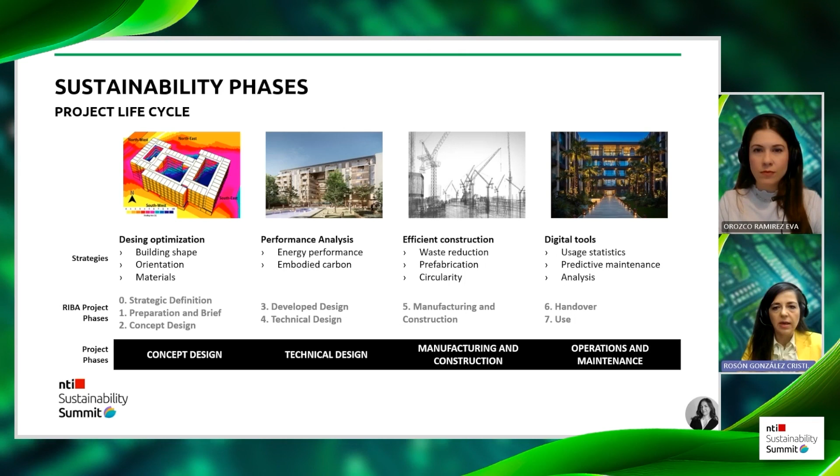So here we are going to start explaining how we use this methodology in these pre-design phases, these early design phases. For that, we usually do some initial sketches and concept model designs, in order to have this basic shape to understand the project in its specific location, which is really important to understand, and this is going to define the project methodology: the specific location of the project.

We have to first understand the specific climate and location of the project, because this is going to inform the design, along with other features of the specific project architecture and other characteristics. Climate is the most important part and so crucial to the design process.

This is because, as you know, it's not the same thing to design a project, for example, in Saudi Arabia or in Canada or other different locations around the globe. Even within Latin America, for example Mexico, the design techniques and bioclimatic architecture principles we apply are going to be different, because even within the same country, the specific altitude of a city or part of the country can be radically different.

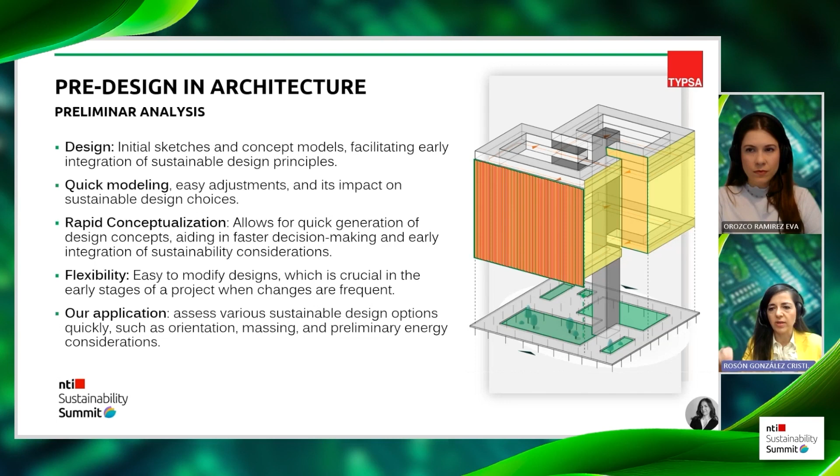Having that in mind, we are going to show you a video of how we approach this design process in a specific project.

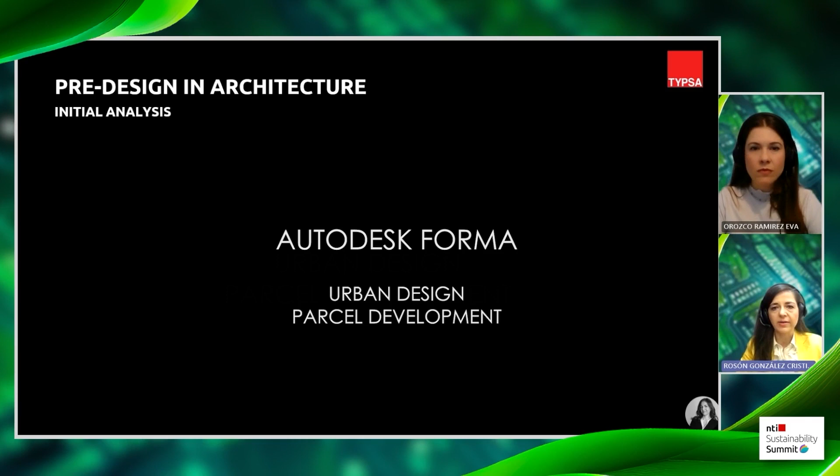This is a project in the northern part of Spain, in Cantabria. It's a healthcare project, a hospital. As you can imagine, the location here is really important to understand the amount of light we are going to have and how this sun exposure is going to affect the surface of the project.

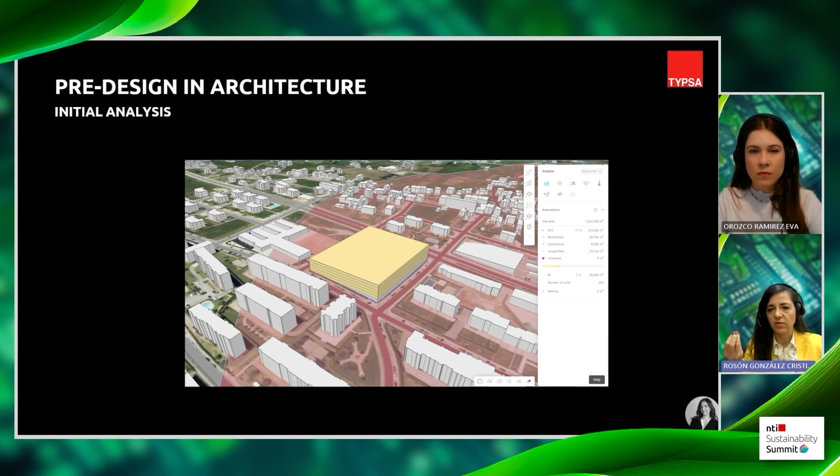It was also really important for us to ensure the privacy of the patients in this case, along with the workers who are going to be there. So we want the comfort and well-being of both occupants — the transients, in this case patients, and of course the workers.

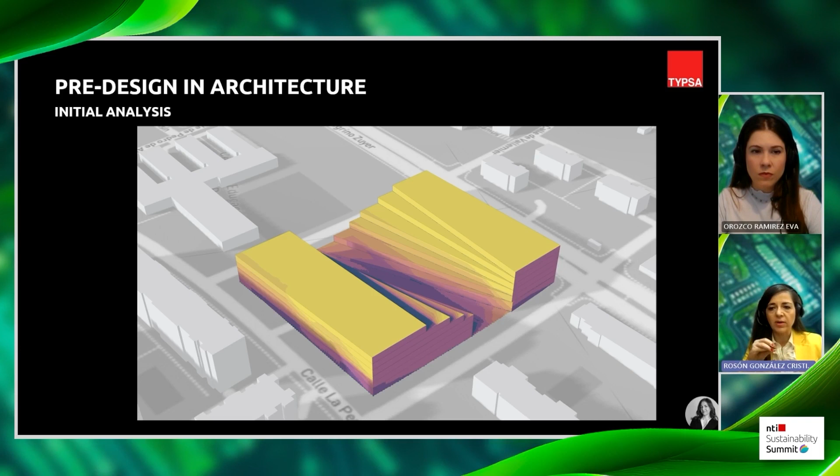As you've seen in this video, we started with a really basic shape with this orientation, but we noticed that sun exposure was really important. So we decided to break this basic shape into different parts to understand how we could gain more light and daylight into the buildings, spaces, floors and levels of the project.

That's why we started with this basic shape and transformed it into this kind of stepped form, with different steps along the shape of the project.

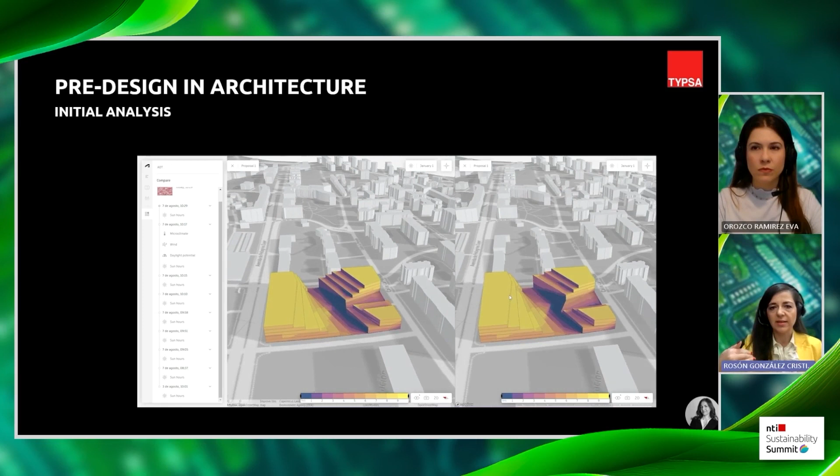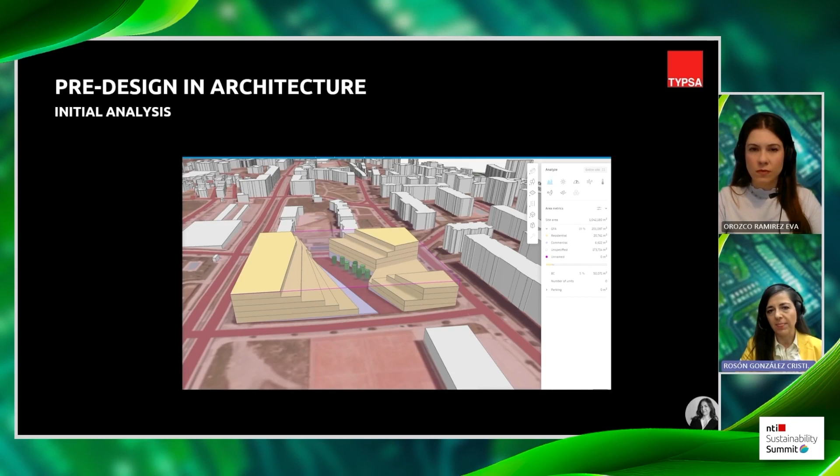In this case we have different orientations, but after that transformation of the basic shape, we turned it into three different buildings that helped us solve the problem we had in this specific project, and make it bioclimatic, incorporating this bioclimatic specific design and structures.

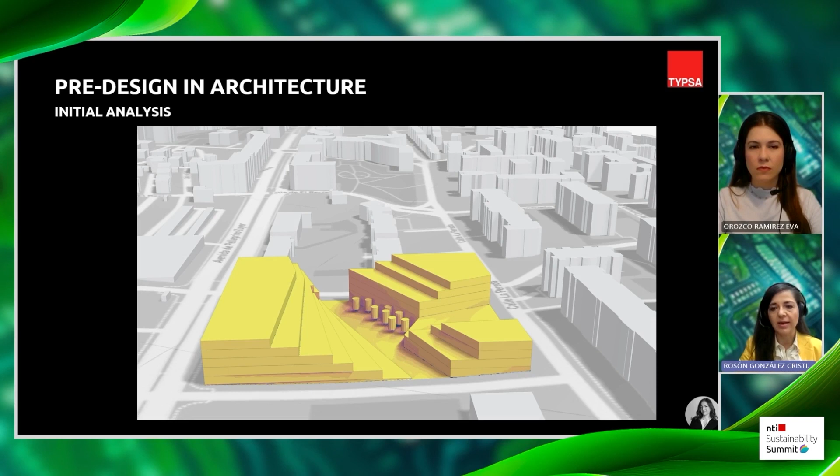Also, this basic analysis with this tool helped us introduce other elements, like vegetation, to use the prevailing winds to make the open space better for the final occupants of the building. So, to sum up briefly, this is our methodology approach for these basic projects.

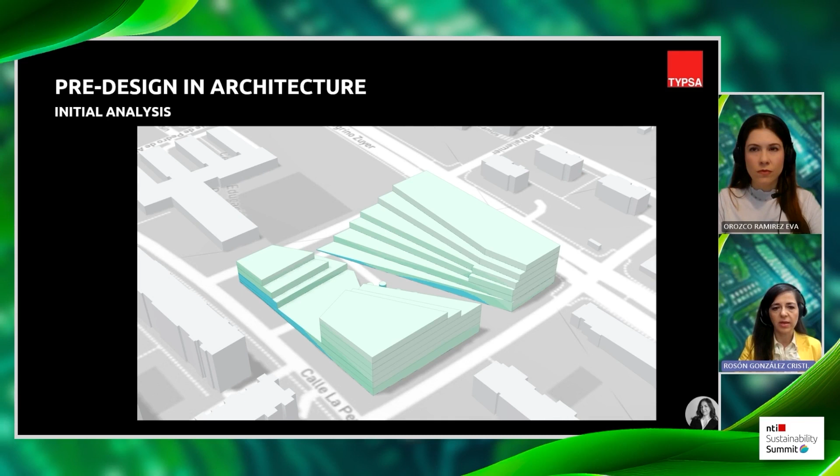I'm going to show you a different example of another project that also relates to our methodology. This is a project in Saudi Arabia, and again, the different location and climate had to be taken into consideration in the very first phase of the project.

After that, we designed, along with our colleagues from design, three different designs to understand how we were going to approach and address the client's needs. In this case, they wanted a lot of privacy because this was a hospitality project — a hotel, a high-luxury hotel in Saudi Arabia.

So for that, we use these patios and plazas inside of the building, and then we transformed that shape and broke it into different ones in order to make natural cross ventilation along the different buildings and shapes of the project.

Of course, in Saudi Arabia we have a lot of sun exposure and overheating, so we had to protect the facades of the building and the building envelope with different elements. After this initial study, we could understand which facades were going to be the most exposed and which ones really need protection, like vertical fins, overhangs, louvers, and other techniques of bioclimatic architecture.

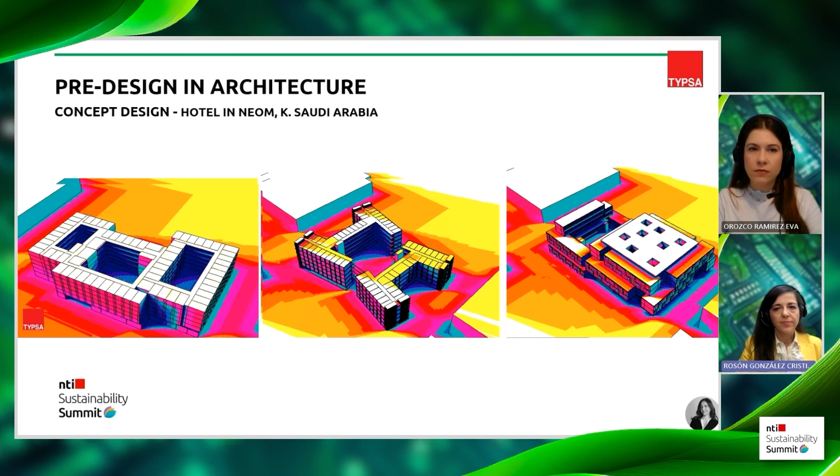After we have decided the basic shape and basic orientation of the project, which are the first steps of our methodology, a second approach in these early design stages is going to be the energy efficiency itself.

For that, we use two different tools like Insight or Green Building Studio, both from Autodesk. After we have this basic shape, we run this model and decide what kind of equipment, HVAC or other equipment, the project may have. Of course, this is always pre-design, early in the design stage, so we probably don't really know which equipment it's going to be in the end, but we have a basic idea.

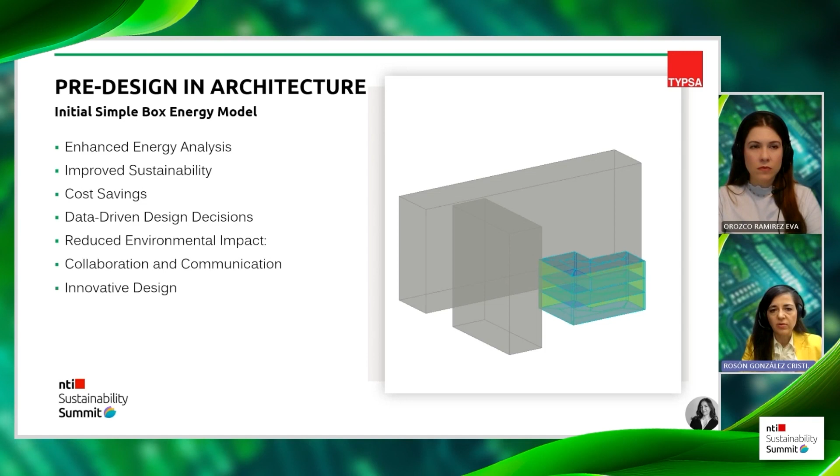This is going to give us an enhanced energy analysis and sustainability insights, because after this preliminary study, as you'll see in this slide, this is the insight that the program gives us.

On the left you see this bar, in which the program tells us our specific energy consumption in the building compared to an international standard. This international standard is ASHRAE 90.1, which probably all of you know. This is the standard that international assessment tools like LEED use to understand the energy performance of buildings, and it's an internationally renowned standard.

So this is a really good point of comparison in terms of energy efficiency for the project, because we know in this case that we are above that line, so we have to reduce the energy consumption.

For that, we have different widgets, as the program calls them. We have two examples here out of 24, I believe, in which we can play with the widget and understand: if we move these specific arrows from left to right or the other way around, are we going to improve or enhance the energy performance, or make it worse?

So, for example, here we have the window wall ratio. If we think of that project in Saudi Arabia, if we increase that ratio between window and wall, we're probably going to have more sun exposure, meaning more overheating, meaning more need for equipment, making the project less efficient overall. So this gives us more specific consumption data, and it's a really good tool to understand how to improve the energy efficiency of the project.

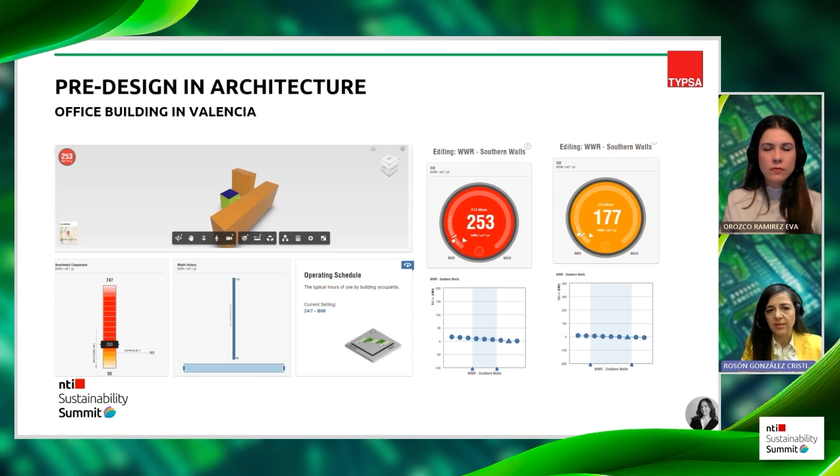Thank you so much, Cristina. So now we are going to focus on the infrastructure area of a pre-design stage project.

Here you can find the workflow that we at Typsa usually follow for this stage. We have two kinds of projects: we can find a complex project, like a cable-stayed bridge or maybe a steel bridge, for example, and on the other hand a less complex project—not to say a simple project, because I guess there are no simple projects.

So in the first case, the workflow we usually follow is to place on InfraWorks the ground and the environment, buildings, and so on, along with the structure or infrastructure that we need to place on this platform.

And once we have this information, we export this to a design software. Depending on the project, we can use Revit or Civil 3D, so that we can improve in the software the level of detail that is required.

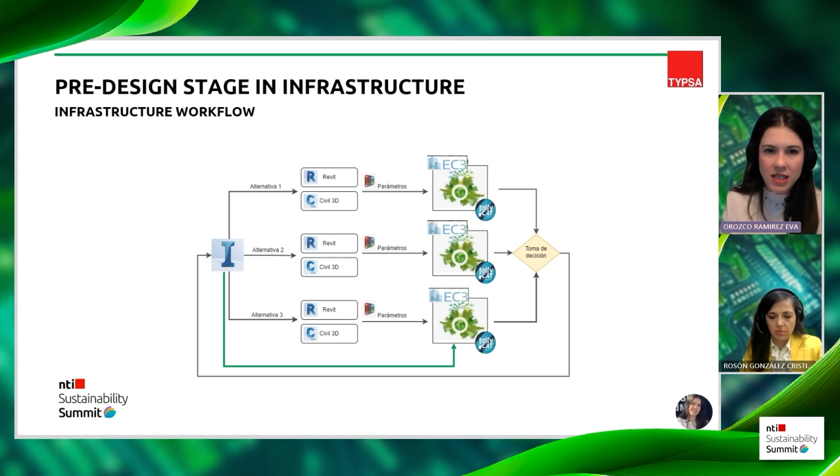Well, as you can see, these are some pictures of part of the workflow that we can follow when we have a complex design. This is a bridge on InfraWorks, and then we can export this to Civil 3D in this case.

Once we have this level of detail defined, as I said, maybe with help of some tools like Dynamo, we can introduce the information that we need, or maybe directly through Civil 3D we can define this material information.

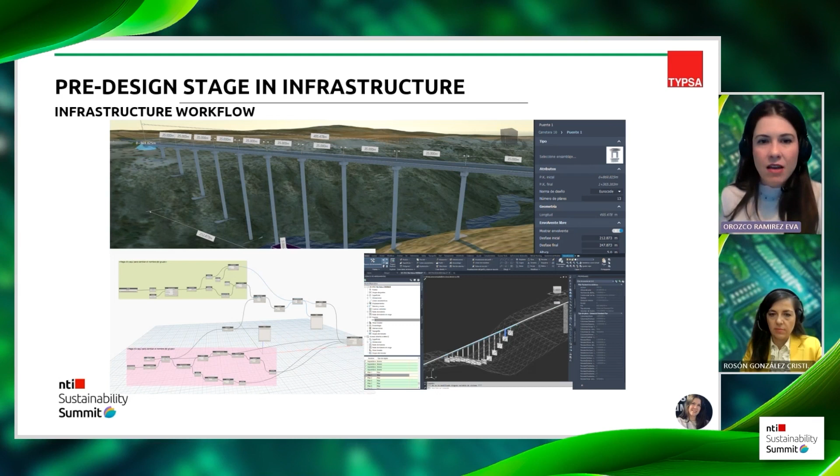And that's the other option, in which we can work directly on InfraWorks. Here you have a picture about how we can define the material on elements with the naming convention that we need. Then we can export this information as a CSV format, and import this to whatever database we need to work on.

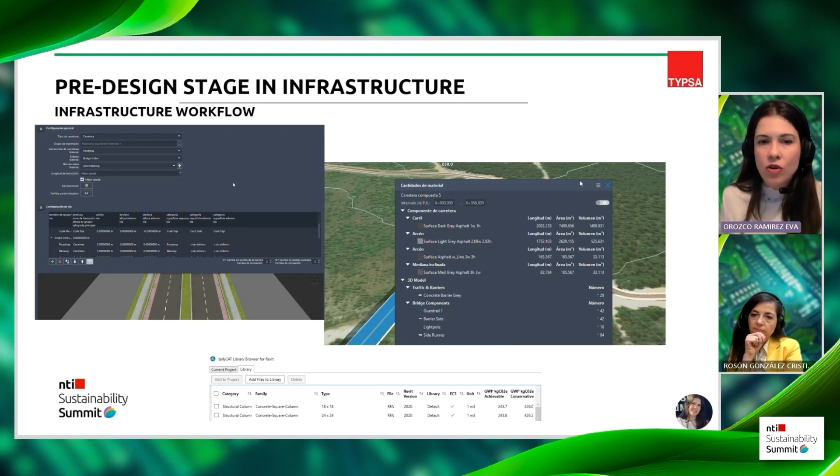Now, following this workflow, I would like to share with you an example that we developed here. You can find a footbridge that was placed in the north of Spain, where sustainability was one of the main points to decide one walkway or another. In this project, the following considerations were taken into account.

Related to the material, as a first point, we tried to choose or introduce recyclable, low maintenance, prefabricated materials, or those that could be reused after dismantling this footbridge.

Another point we took into consideration in this project was the space for pedestrians. The third point, which was very important, was the lighting ratio for pedestrians from one side to the other of the walkway. The client requested a platform continuously illuminated, avoiding dark areas.

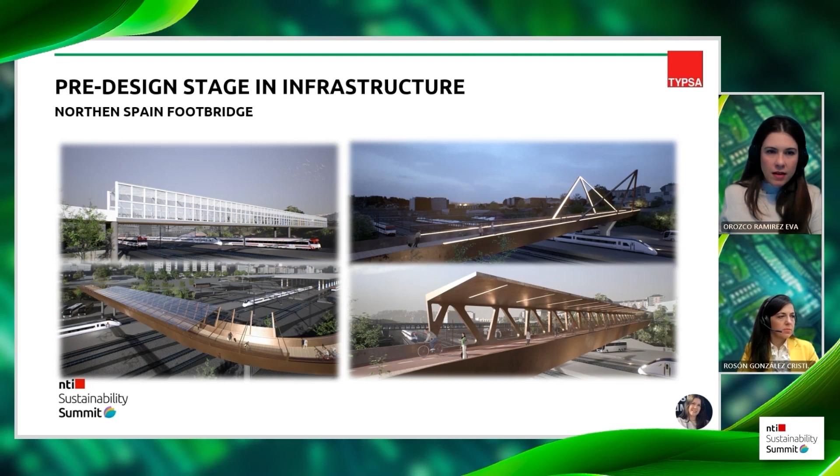Okay, this is another technique that we usually use in Typsa. It's the GIS platforms that have, as you know, a lot of data inside.

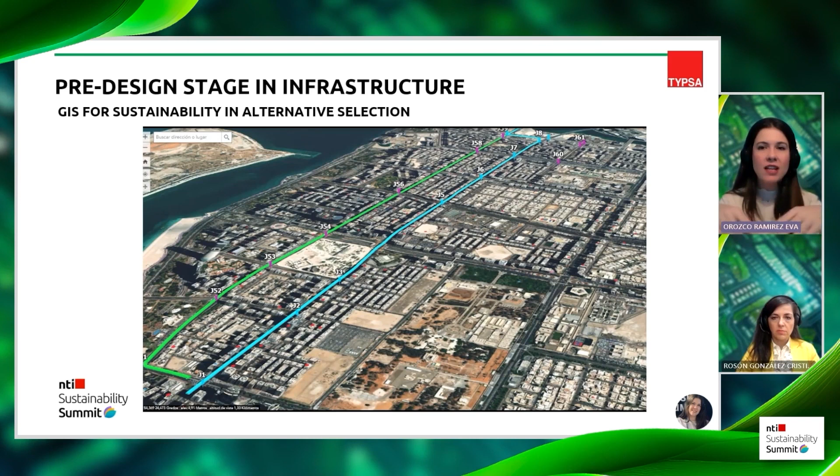This is an example of a metro line that we had to pre-design. We propose the two alternatives that you are now watching on the video. We had the green and the blue one, and we took into account not only the environmental conditions such as biodiversity, flooding, protected areas, and so on, but also community support.

The social part is also contained in the sustainability process. It was very important to study the distance to hospitals, which are the circles you are watching on the picture. Those circles represent emblematic or important points on the city, such as hospitals, educational buildings, schools, and meeting points with the bus line.

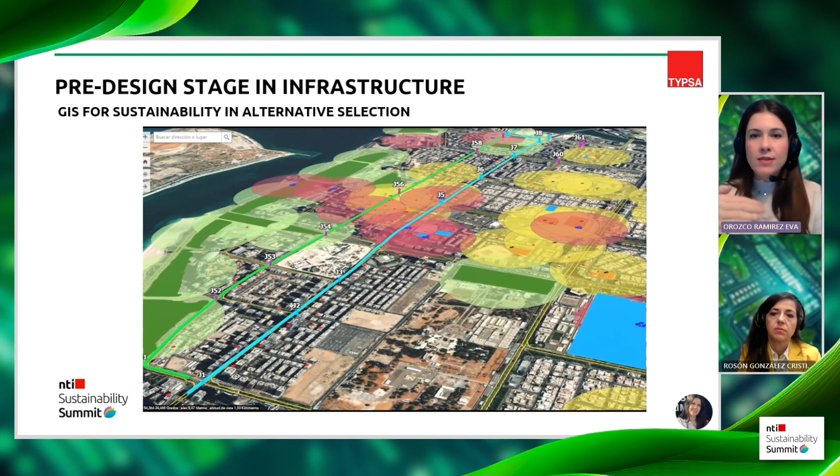So with this example, you can see that we can consider not only environmental factors, but also the social aspect involved in sustainability. All this kind of data we can find in GIS platforms.

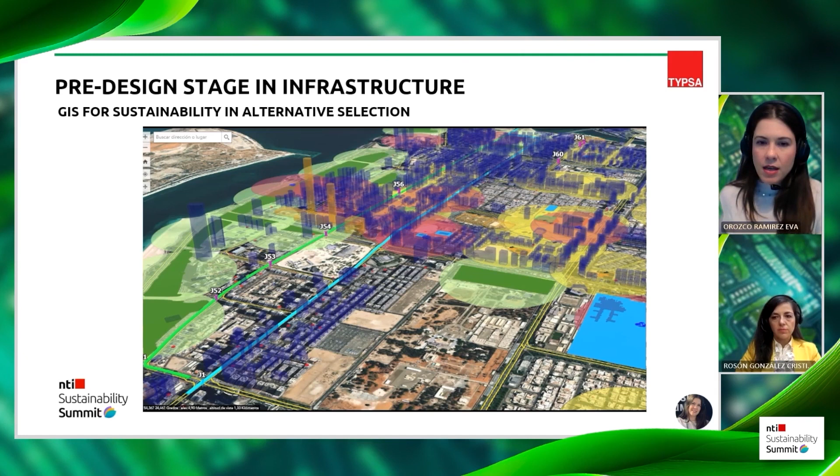The last slide I want to share with you related to this infrastructure part is the generative design that we usually work with in Typsa. I suppose you know about generative design, but a little introduction if you don't: it is a design process that involves using algorithms and computational models to explore several design options and generate solutions based on specific criteria. So we can obtain thousands of optimal solutions according to each situation.

We can not only input infrastructure positioning parameters, but we can also limit options and alternatives to sustainable parameters such as the amount of emission from specific materials.

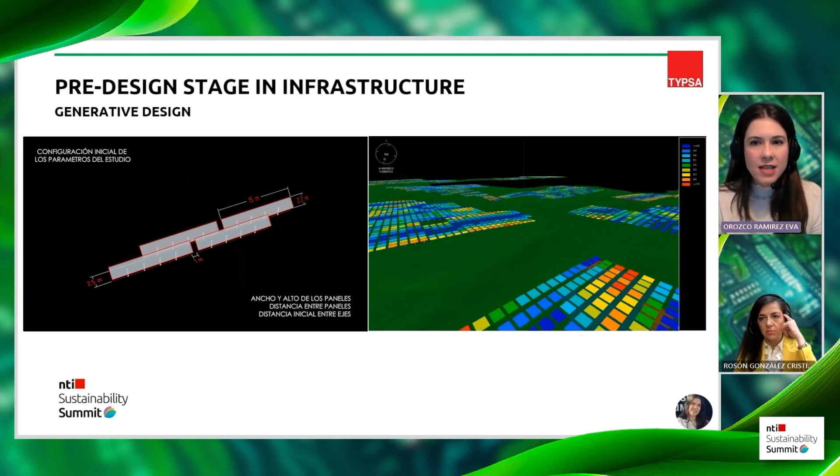On your left, you can see an example of positioning and quantity of solar panels based on Earth movements, materials emission, and positioning parameters. And on the right, I'm going to click play. There is a video about an internal software we have developed.

The name is PVGrad, and it contains, once you have the solar panels placed as in the left part of the slide, it takes into account not only the terrain, but also the calculation of the best panel rotation, depending on the sunlight.

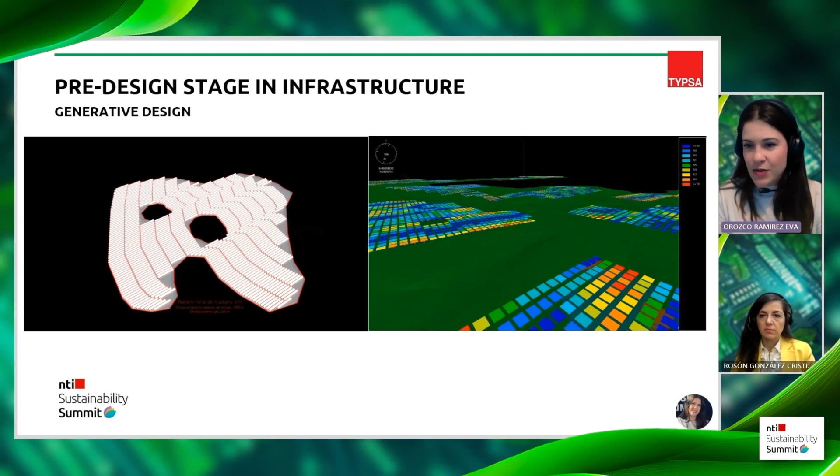So these are techniques that we usually work with in Typsa. And now I'm going to leave the control to Cristina for the same. She's going to talk about generative design as well, but in the building area.

Thank you, Eva. Well, as Eva has really well explained our approach to generative design, I am going to explain the very same thing but applied to a different scale that we have talked about previously. We have talked about a smaller approach of projects like typical office buildings, healthcare, hospitality, that kind of buildings. And this is the generative approach applied to a master plan project.

This is also a master plan project that we are designing in Saudi Arabia. We work a lot in this country, as you can see. So we apply this technology to better understand how we could design this project. We are going to see different videos to understand this generative design process.

I'm going to explain that along the videos, but for better understanding, we used different scripts and techniques and features to model this master planning. So we took into account the street widths versus plaza spaces, building heights, solar radiation, and different kinds of vegetation that we could apply to the project.

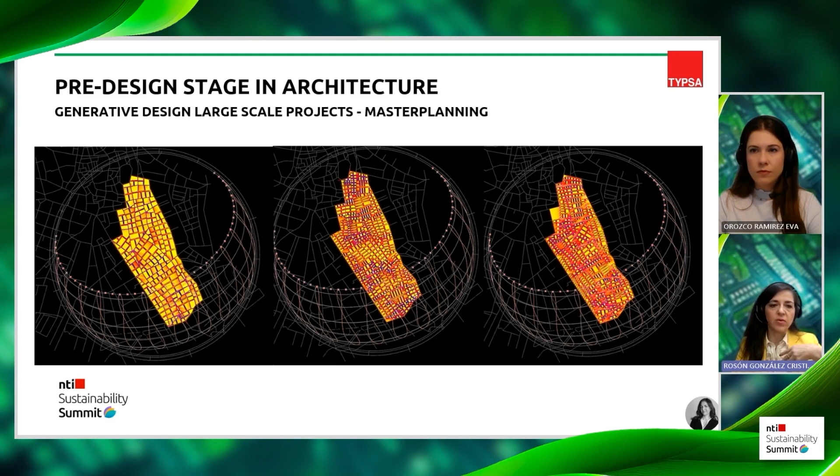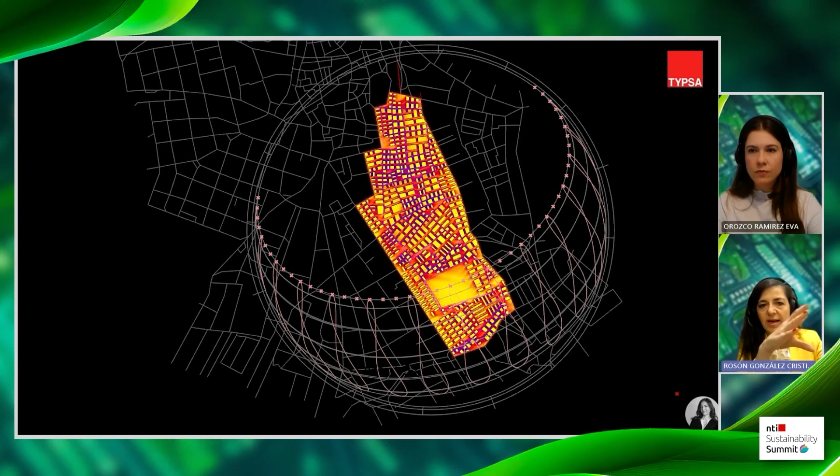As you can see here, this is the top view of this project. The program is calculating the relationship between the open space, the constructed space, buildings versus heights, etc.

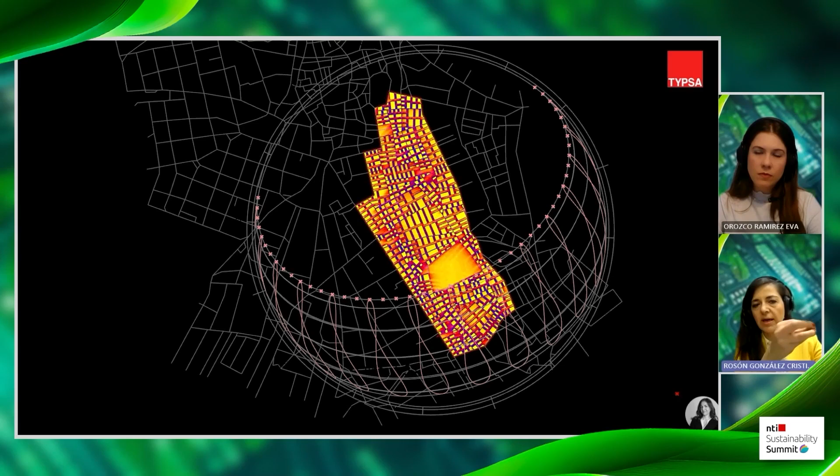Also, as you can see here, since this project is in Saudi Arabia as well, it was really important to take into account sun exposure on both the buildings and the open public space, these plazas. It was really important to bear that in mind, because depending on that specific feature, the final design was going to be different.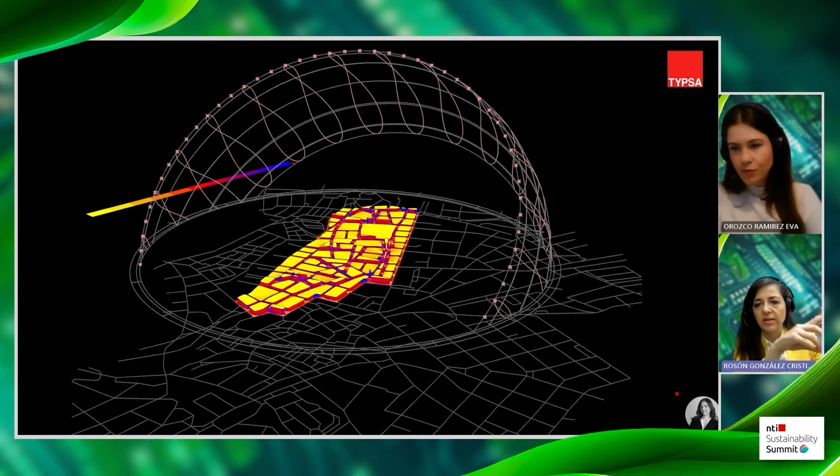This open space, if it was going to be bigger, probably we should need to take into account how to reduce the heat island effect on these surfaces, using different techniques like more vegetation, open space, permeable pavements, lighter pavements, and all of these techniques to reduce this heat island effect on master plan projects.

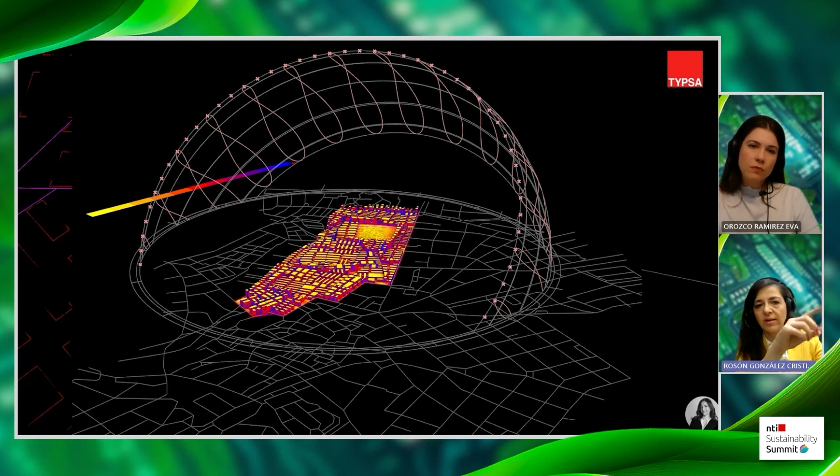So the next video we are going to see is how this relates to the building height and the specific relationship between the constructed and non-constructed area. Here we have this simulation running along the year, so you see different options compared to different days along the year.

It's really interesting because this program is telling us that if we have, for example, narrower streets related to these building spaces, the sun exposure is going to be lessened compared to more open and bigger spaces.

So this is also a really important methodology we also take into account when designing larger projects, like this master plan project city in Saudi Arabia.

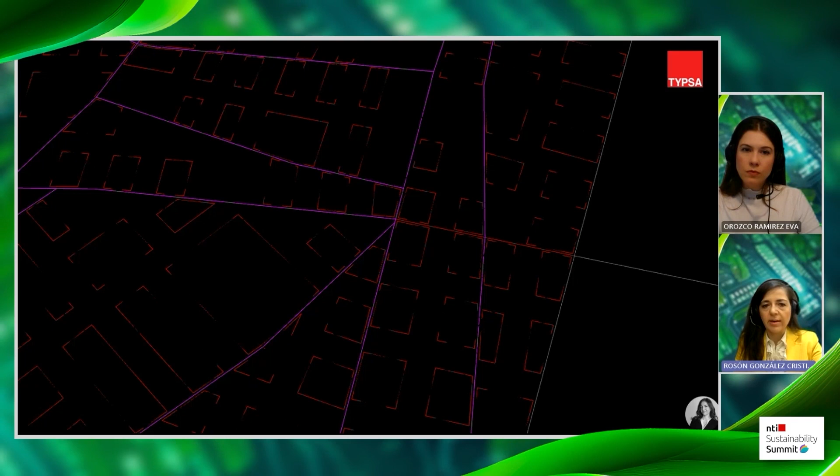And finally, we are going to end with another phase of these design phases. We have talked about pre-design and design, and this is the latest option in the design. I believe Eva has explained you about carbon emissions and carbon footprint that we bear in mind when we design infrastructure projects and building projects.

So when we have this basic shape, the energy performance of the building, finally we have to decide which materials we are going to use in our project. So for that, this is when carbon methodology comes into action.

So we have these different designs, these different materials, and we compare them and comprehend their carbon footprint impact on our project. We run them in this Carbon Designer software. We use different softwares for that - we have used Tally, we use EC3, we also use One-Click LCA. All of these softwares depend on the scale of the project, the inputs we may have, and the outputs we really want to obtain.